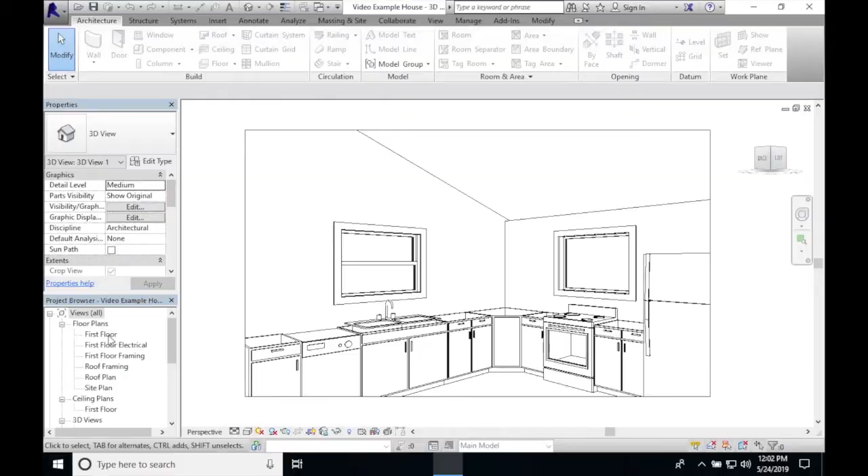Putting in upper cabinets is best done from the first floor. Use your component tool and start typing in upper. We're going to start with the corner again: 12-inch depth, upper cabinet, corner unit, wall.

Place it along one wall and make sure that it's going to fit in the cabinet. Leave a little space between it and the wall because it will not snap.

From your modify tools, use the align tool. The second thing you click on is the one that's going to move. So I want to first click on the wall, then the cabinet, and this will align it to the wall next to it.

Back to our architecture tab, grab a component. This time we're going to use upper cabinet single door wall 18-inch. We'll place two of them, one there next to the corner cabinet and one next to the stove.

Make sure it attaches to the wall and use your align tool again. Click on the corner cabinet and then the 18-inch cabinet. Click on the fridge and then the 18-inch cabinet.

Back to our architecture tab, component. This time we're going to be using the 42-inch upper cabinet double door wall. Place it just a little bit away from the corner unit.

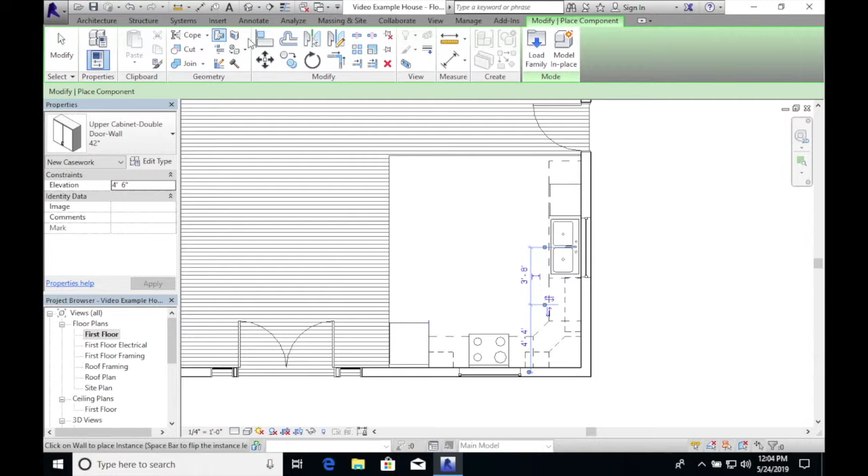Use your align tool. Click on the corner, then your 42-inch cabinet. We have one more cabinet to place up here.

Back to architecture, component, and this time we're going to be using the 39-inch cabinet. Place it along the wall, leave a space between the end and your base cabinets. Use your align tool, base cabinet, wall unit.

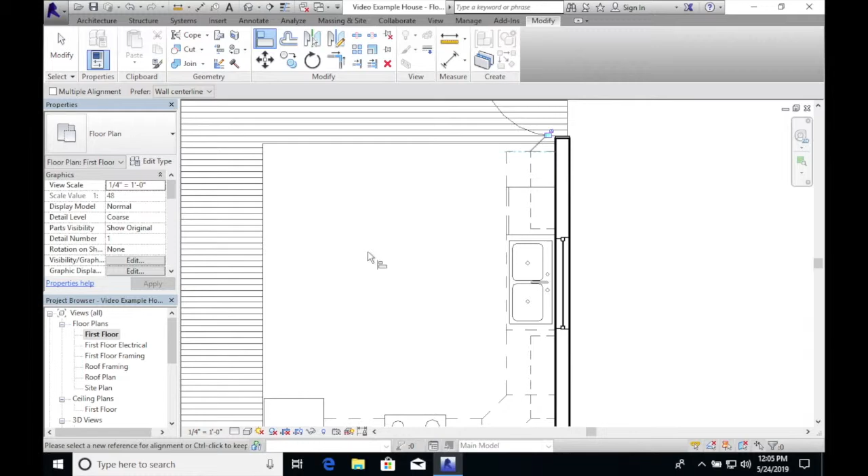All of our base cabinets are in, and now we need to put in our countertops. So back in architecture, we're going to do this using the floor tool. Select the floor tool.

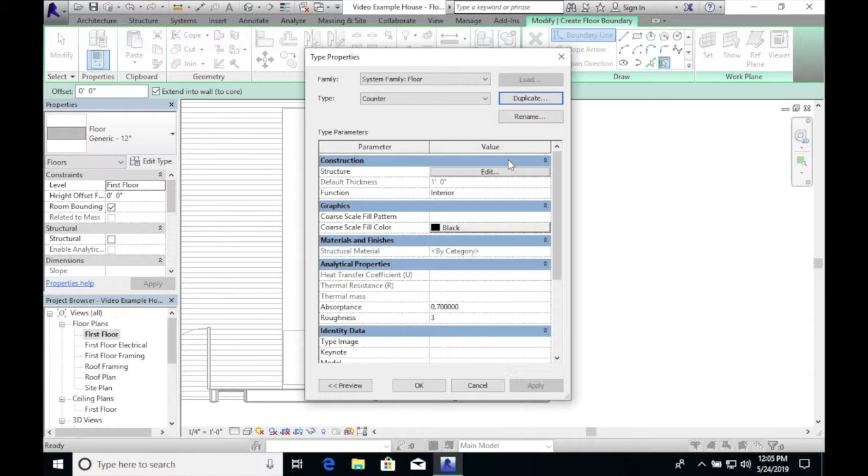Generic 12-inch, edit type, duplicate, and we're going to call this one counter. Under construction and structure, click on edit and change the thickness from 1 foot to 0 feet 1.5 inches. Click OK, double check, click OK.

Change your height offset in your properties menu to 36 inches, 0 feet 36 inches. Apply, and now we can start drawing.

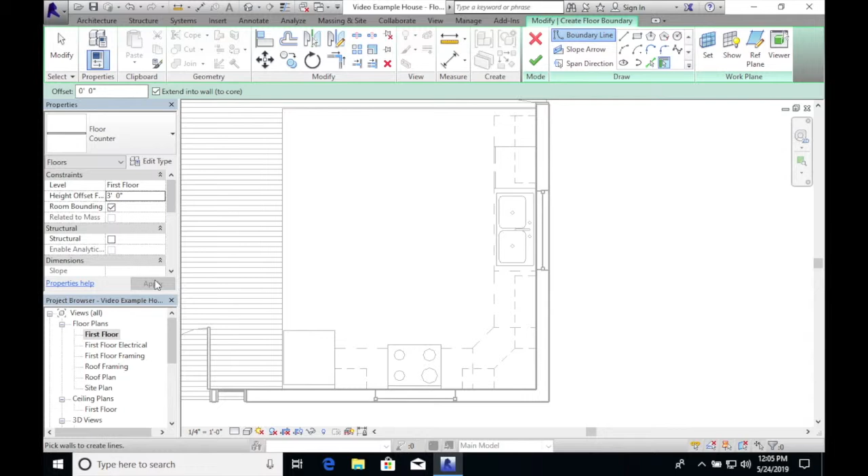Start with the easy one first. Use our rectangle drawing tool. Make sure that you grab the node at the back corner of the stove. Go over till it snaps to the fridge. Go up until you reach a counter depth of 2 foot 1 inch.

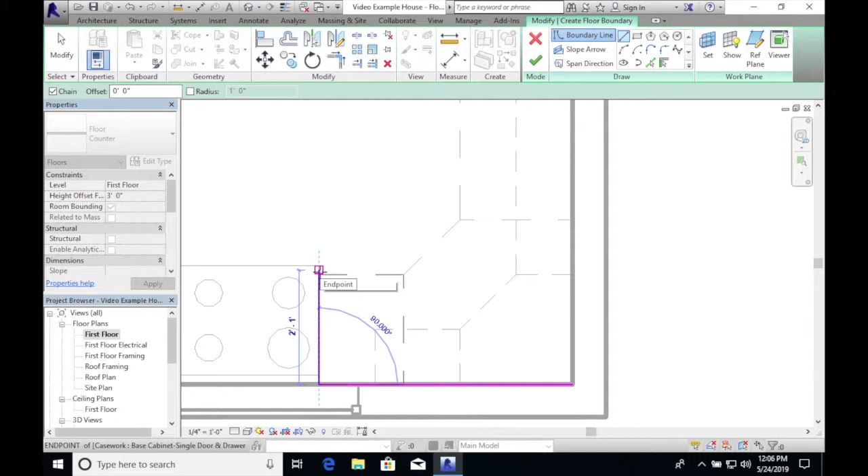For this L shape, it takes a little bit more work, but we're going to start here in the corner and use the line tool. Grab the node in the corner, over to your stove, up to 2 foot 1 inch, over until it snaps to the edge of the cabinet.

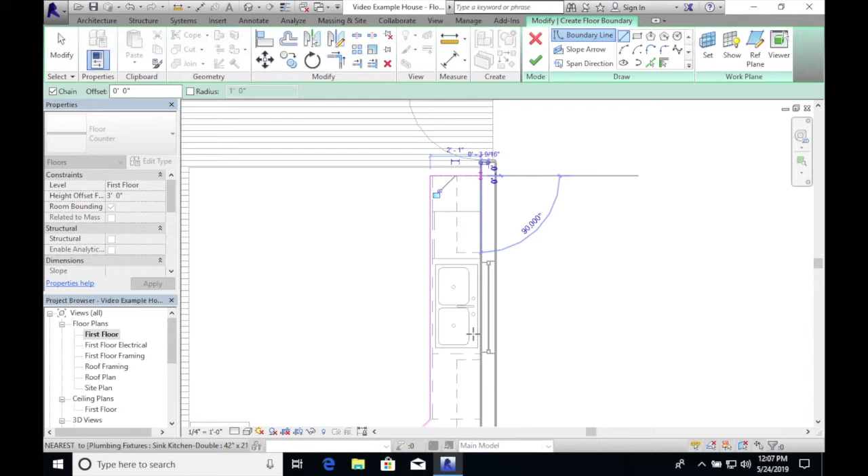You'll get a blue line. Follow this at a 45-degree angle until you get the next snap line. Make sure it says 45 degrees. Now we want to move all the way up to the end of our cabinets. Make sure it snaps to the end, back into the wall, and back down to where we started.

Grab our rectangle tool again so that we can make a cutout for the sink. Make sure that you are grabbing just the sink, which is the smaller rectangle inside the cabinet. And when you've completed the drawing, click the green check mark.

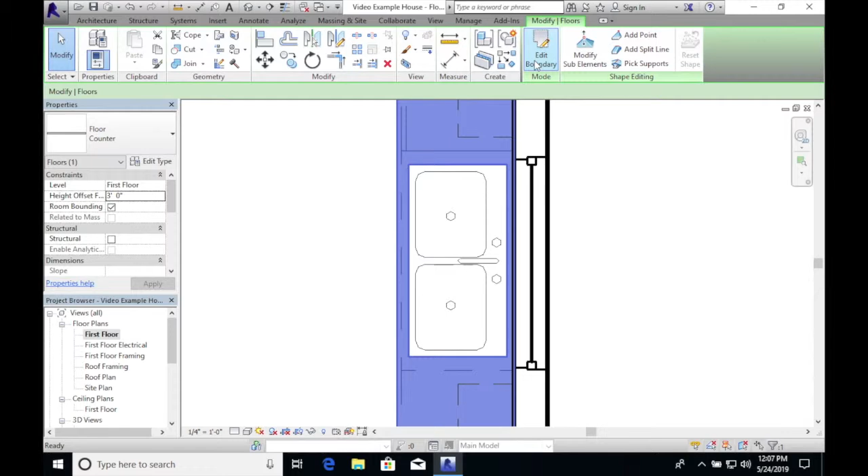Now when I go to my 3D view, my kitchen has upper cabinets and a counter.

The last thing I want to fix is this cabinet; for some reason it's a little short, so we'll select it, edit type, and since we're not using this one again, we can change the height for this specific cabinet, and we're going to change it to 2 foot 6, 2-6.

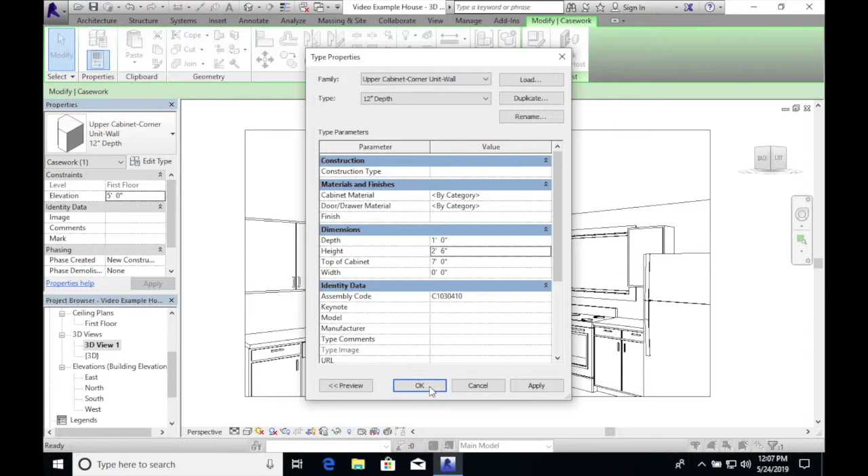Then we need to drop it down to the same height as the other cabinets, which is over here in your properties under elevation. You want to do 4 foot 6 inches.

And that aligns everything up and gives us a cabinet of the same height. This concludes Video 7, Part 2, Upper Cabinets and Countertops.